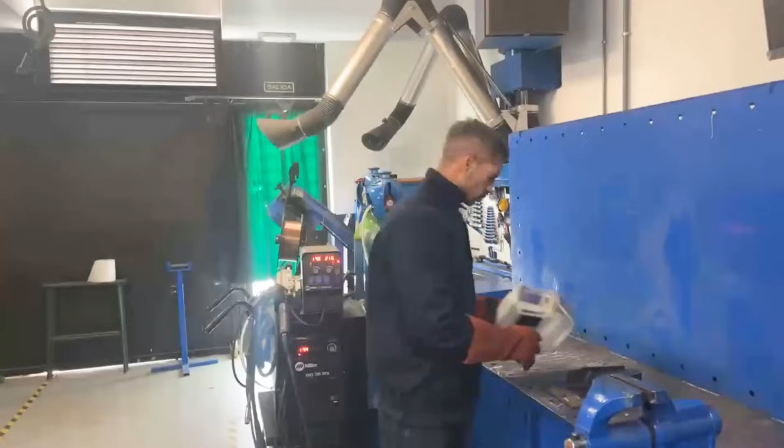Hello, I was waiting for you. I was actually training on this workpiece. This workpiece is a suspension bracket. It's quite complex - this is my 5th trial, but it's not actually the most efficient way to train nowadays.

Not only on real welding, I am actually training also on a simulator, on the Seabery welding simulator. I'm going to show you more about the augmented training methodology that we apply, because every time I train on this workpiece is costing us around 300 euros. As you can imagine, it's not the most efficient way to train, not the most sustainable either, and not the safest, because it's quite dangerous. But now I'm going to tell you more about this methodology, this technology. Come with me, let me remove my jacket, and I'm going to show you everything about the augmented training methodology that we apply with the Seabery simulation technology.

There we go. Come with me, please.

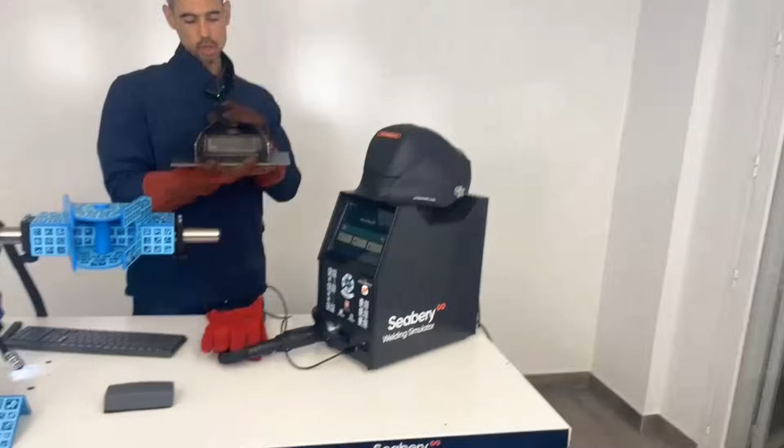Welcome to our Augmented Lab. The coupon I was showing you before is a suspension bracket. It's on carbon steel, and it's quite particular. I need to weld 4 or 5 different welds here, welding joints, and doing that in real is not the most efficient way. We actually have much more engaging, safest, green and efficient ways to do it, which is using the Seabery technology, by which we are able to customize welding training joints using augmented reality.

What I have in my hands right now is the simulation coupon. It's the coupon that we use to parameterize exactly everything that I will be doing in the real workshop - the material, different joints, the WPS, everything - so that we can visualize and exercise all of that using this simulator.

Today, we're going to be talking about the technology. We're going to be explaining what this is about. And the most important thing, we are going to be actually showing you how it works for real. So we're going to be testing the technology in front of you. My name is Antonio Fernandez. I welcome you all, thank you very much for your valuable time. And now we're going to go to the presentation that we have prepared for you.

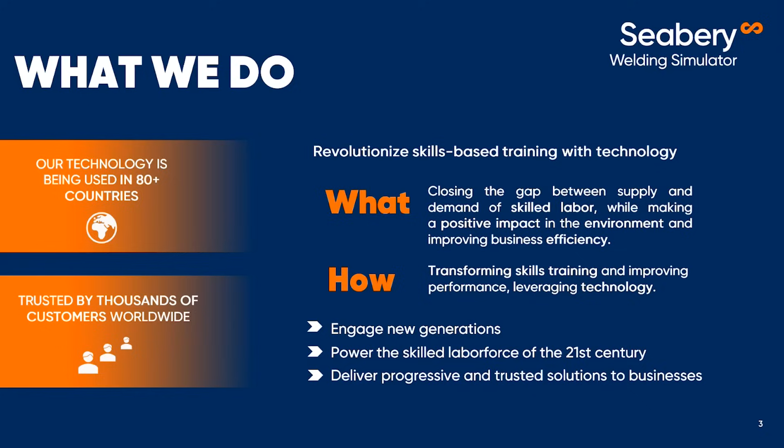You may know that there is a tremendous shortage of welders in the global industry. No matter if you look at America, Europe, Africa, or Asia, this is a common problem - it's a problem of the world. And this problem cannot be sorted out by using the traditional methodologies to train welders, because this is very inefficient, and it's proven that it's not working. Also, when you look at engaging new generations into the welding trade, it is fully demonstrated that you cannot do that with the traditional methodologies.

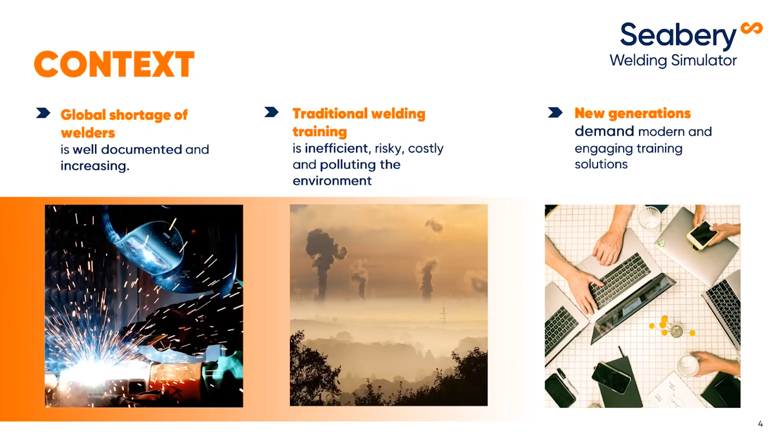But we have a solution for it. This solution is what I was telling you about earlier in the workshop. It's called augmented training. The augmented training is a methodology that combines the real workshop together with the simulation space. This is very important to understand: this methodology does not eliminate the real workshop. Totally the opposite - this methodology is going to enhance the real workshop by preparing the welder in the simulation space.

The simulation space is what you have on the left of that augmented lab. It's a space that works on simulation, which means we don't use real materials, we don't have real consumables, and therefore, as you can imagine, it's going to be very efficient in cost and in time. Also, it's going to be fully green - every time we weld here, it's going to be with no CO2 and with very little electrical consumption, which is going to be very beneficial for our environment.

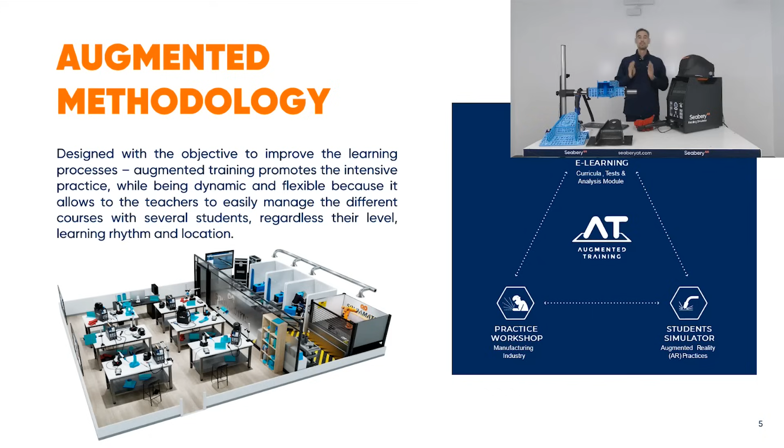Once the welder has trained the muscle memory, then it will go to the real workshop, where we are going to be mastering the skills. We still need to go to the real workshop, but we're going to do it in a very efficient way, so that when I go, I will know what I'm doing. And all of that is going to be tracked and coordinated through an e-learning platform, because this technology allows to send and retrieve information from a centralized database that is going to be fully controlled and managed by the welding instructor or the welding supervisor, which is very powerful and interesting.

We'll show you more about that too.

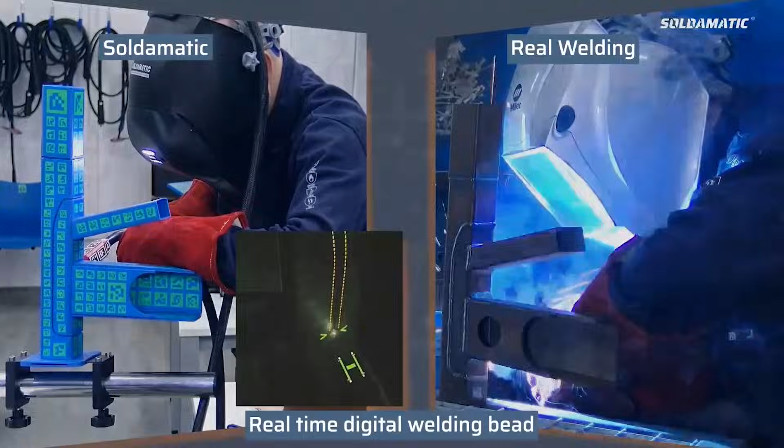This video resembles very well the realism that we are able to achieve with this technology, because this is the key. The key is to be able to replicate in a very realistic way that real environment in augmented reality. What you have on the left is the simulation space. You have the welder wearing the gloves, wearing the helmet, and welding in the same position as in the real workshop, which is on the right.

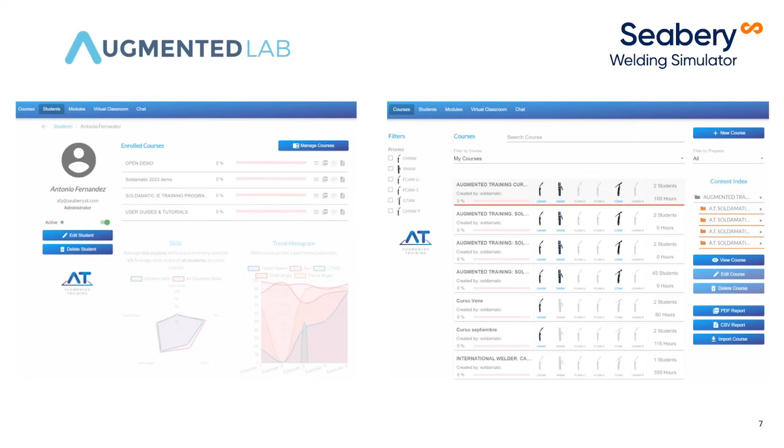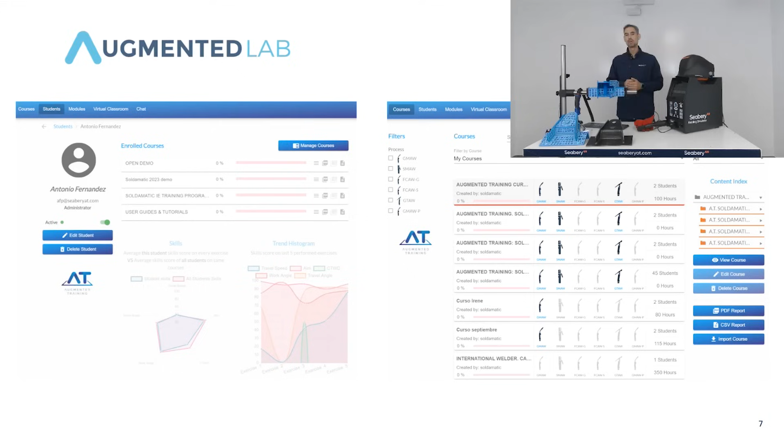All of that is happening on the simulation space, which is going to be centralized with information through an e-learning platform that is going to provide us with insights, with reports. It's going to allow us also to personalize the training path for every welder, etc. We're going to see also more about that. This is a very powerful tool that cannot be replicated in real welding.

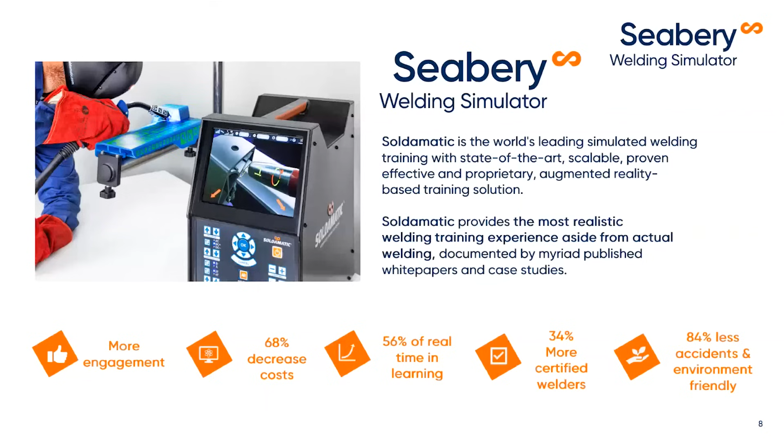So this methodology is actually proven. As I said, we have deployed this technology in more than 80 countries for more than 12 years. And with all this history, by testing it with different institutions, different companies, academics, industrials, etc., we have been able to conclude that this technology is, first of all, more engaging. Secondly, it's going to be also very efficient. Different numbers apply, but you can count on more than 60% savings on applying this technology, the combination of augmented reality with real training, but also the reduction on time.

Reduction on time, especially because when we are welding on simulation, we're going to be focusing on the most important part, which is the arc time. Arc time means the time that I'm training my muscle memory, which is what I really care about. As a conclusion, we're going to have better welders, more certified welders, more quality on the welders, because these welders are going to be able to train in the same amount of time, with more attempts, more trials, and then we're going to be able to have better welders.

That will reflect at the certification point. We will be able to prepare our welders better for certification. And all of this with a very green technology. Imagine that one single hour of real welding in that workshop will be issuing around 6 kilograms of CO2. Here we are doing 0 kilograms of CO2. So you can imagine the great impact that we have on the environment.

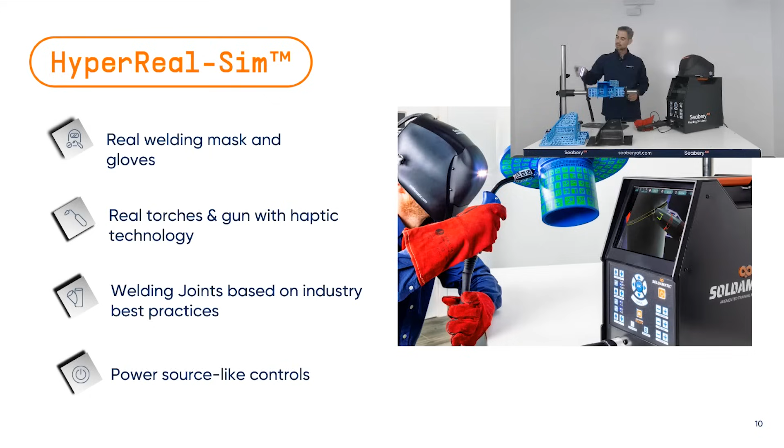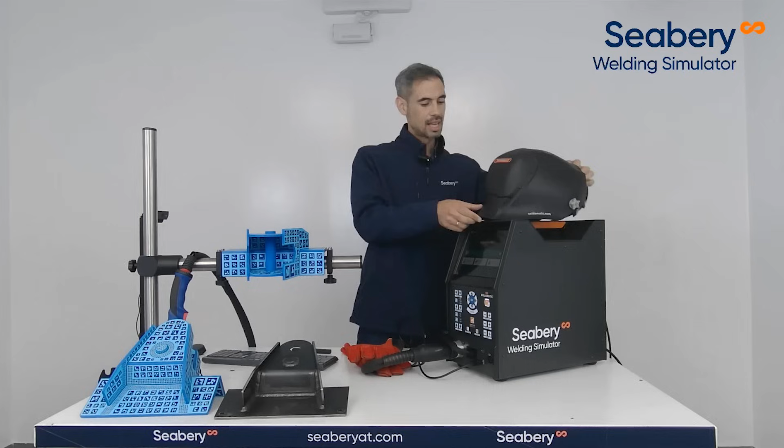The most important point here is to make sure that the technology resembles the real workshop. It needs to be very realistic, hyper-realistic. Not only in the real elements, as you can see here, we are using real torches, for instance. This is very important because we're going to be training the muscle memory, so it needs to really feel the weight and the shape. We are going to be using real gloves and a real helmet. We need to make sure that this is as close as possible to the real scenario that we're going to be living later in the real workshop.

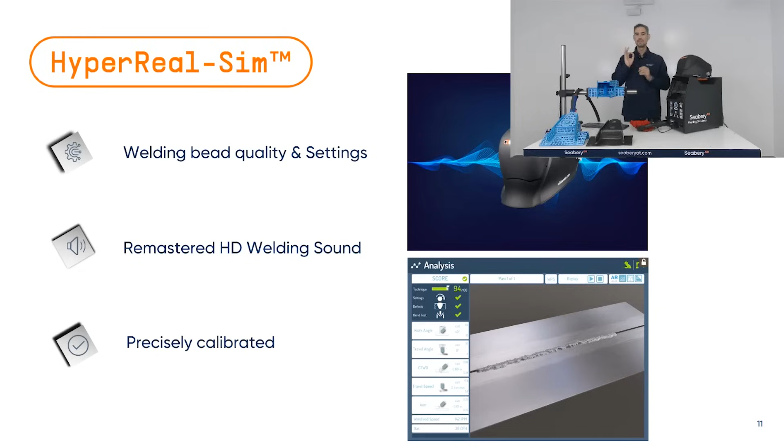And also what we see and what we hear. When we look at this technology, this cannot be thought of as a video game. Everything that happens in the welding scene, in the welding bead, all of that needs to resemble real welding in the same way. That's what we call parametrization. We have parameterized the technology in such a way that what you see and what you hear is going to be very, very near to what you will see and hear also in the real welding, which is key for a good welder.

And not only that, we go beyond reality. Not because we're going to make anything new or imaginary, but because we are able to use technology to analyze the quality of the welds and to understand in a very objective and pragmatic way the skills and technique of the welder. We are going to be able to track mechanical resistance, cross-section analysis, as you can see here on the right of the screen. Imagine doing that in the real welding workshop only - it would be impossible, very costly.

And not only that, we will be able to have real data. In the real welding, it's very difficult to have data. This technology is employed in different industries, whether it is for training providers or whether it is for actual companies that are training new welders or upskilling actual, professional welders.

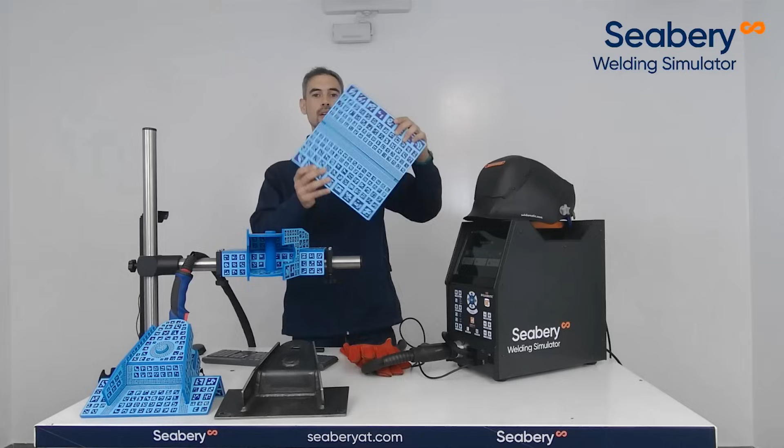The technology is fully prepared to answer not only the standard certification coupons—coupons that everyone knows, like this butt joint—but also to answer the demands of specific sectors, like what I have in my hand. This is what we call an advanced welding multi-joint, which resembles the best practices in the railway sector.

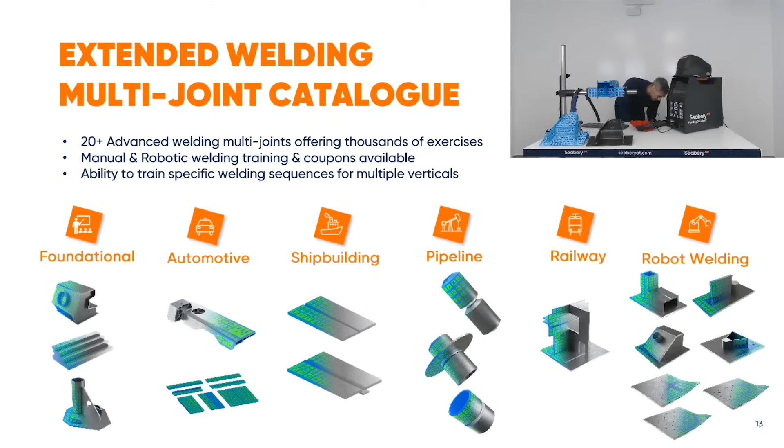On the screen, you'll find different applications for different industries, like automotive, piping, and all of that. So we have multiple industries, and we're able to customize further. Whether you are training on manual welding or robotic welding, I'm going to show you now how this technology will help you train better welders.

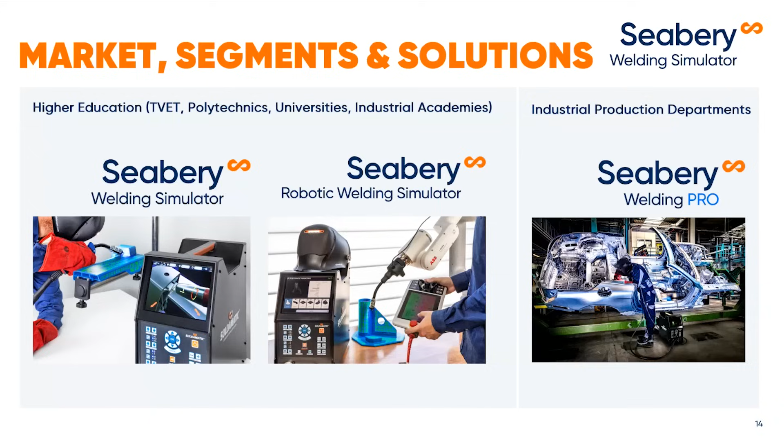This can be applied by the training sector, as I said, or also the industry sector with Seabery Welding Pro, which is also what I showed you before here. This is actually Seabery Welding Pro. It's taking the technology to the highest level so that we can resemble as realistic as possible the real workshop.

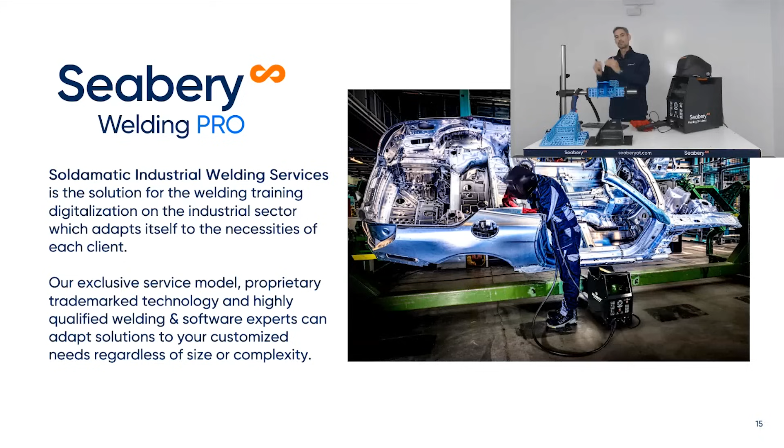Welding Pro is a service, a technology provided to industrial companies to make sure that their actual professional welders are able to upskill according to the demands of the production department, so that we can increase their performance and therefore have better results in the production line, lower quality issues, and become much more efficient.

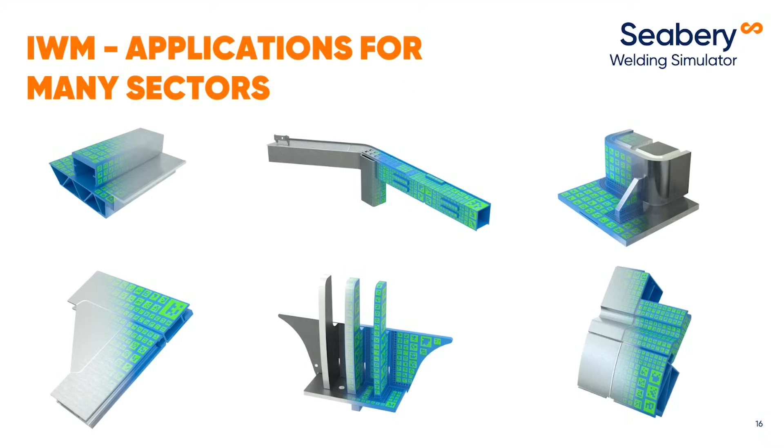Here on the screen, you can see multiple applications of customized coupons. This sort of customized coupon we can apply to any sector, whether it's construction, heavy fabrication, shipbuilding, or railway. These are some examples only, even nuclear sector.

Today you're going to understand fully if this can be helping you in your actual problems. Let's get inside a little bit more on the technology and how it's going to resemble those coupons in Welding Pro. This coupon is a butt joint.

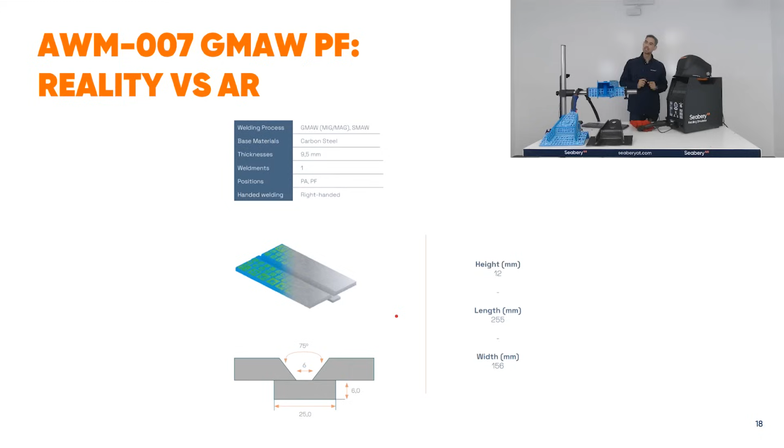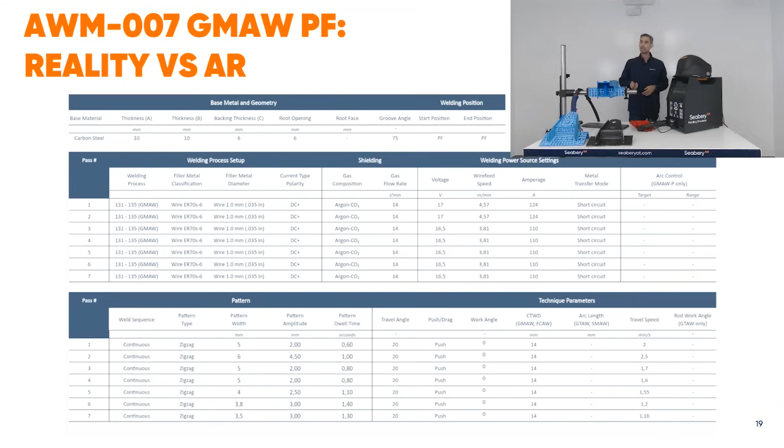It's a butt joint, but with a backing—a specific backing of 25 millimeters. We have a root of 6 millimeters, it's carbon steel, and the thickness of the plate is 9.5 millimeters. We're going to have a full WPS, parametricized in the system. This WPS is going to give us the backing details and a number of passes.

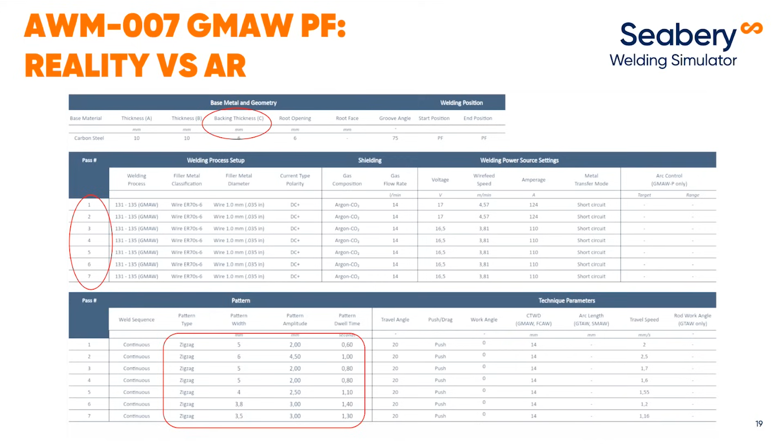In this case, seven passes. Every single pass is going to have a waving of zigzag. We're going to have a pattern of zigzag with different width, amplitude, and dwell. So we can get to that point—to this very single detail of the WPS with a very specific travel speed.

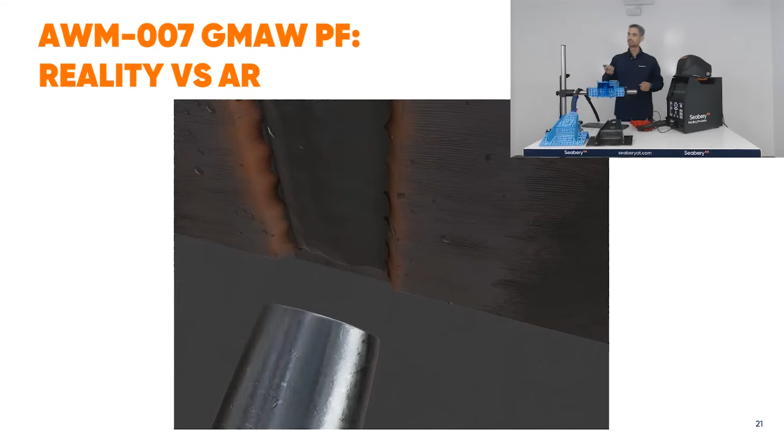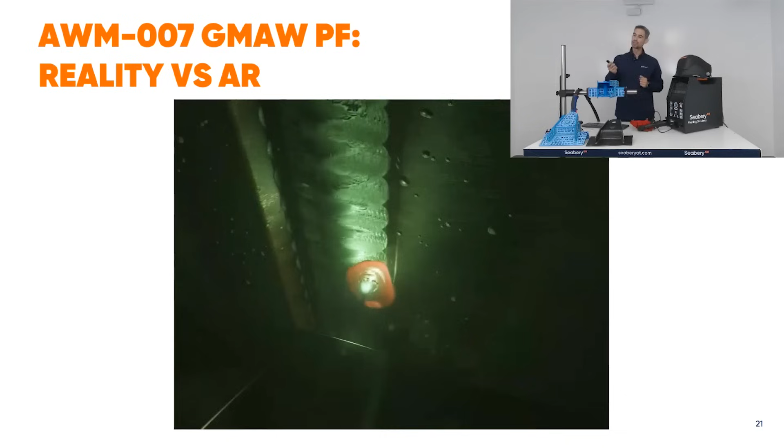Here you're going to see also a little video of the simulation, so you can see how the welding puddle is merging. You can see how realistic it is. You're going to see that in a second in real, anyway, because we're going to be welding today. But I want you to already have a feeling of what the simulation looks like, and not only the simulation, but the result.

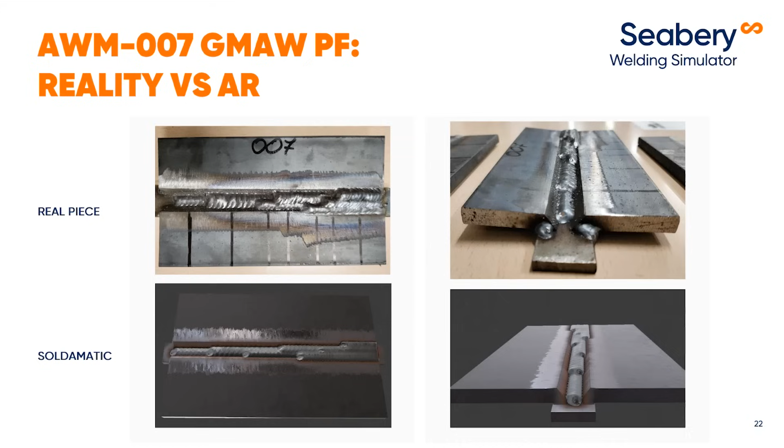The final result in this particular coupon—you will see the one that was welded on the real piece on top, and at the bottom, the simulated one. You'll be able to differentiate every single pass. As we said, we welded 7 passes, so you can see clearly every single pass via visual inspection.

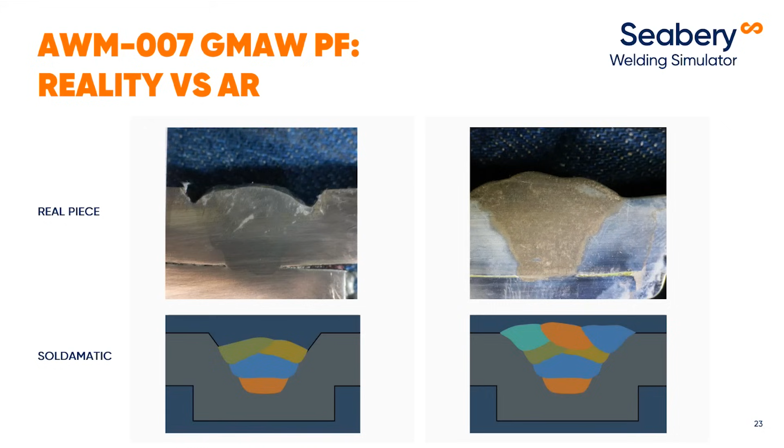But not only that, we can get inside—we can do a cross-section analysis. The one done above was done in the real coupon, as you can see, but the one below was automatically given by the technology, in the simulation, without any cost. Imagine how powerful it is.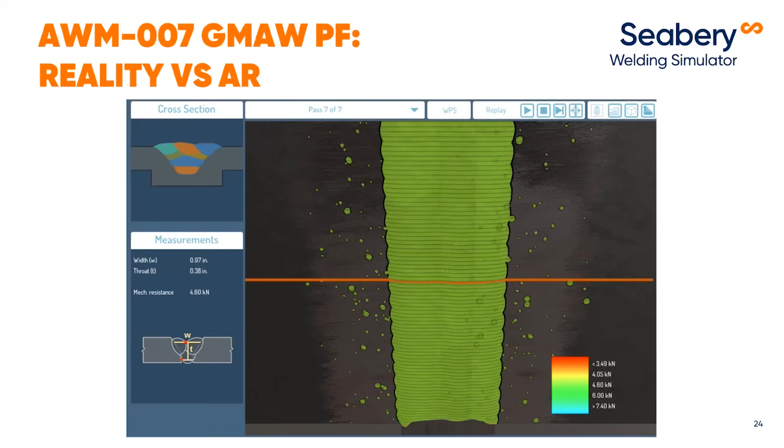We're able to see the cross-section, differentiate every single pass, and have a proper understanding of the mechanical resistance of that particular weld. Look at that—this chart shows us, in the very specific section of the weld, what is the mechanical resistance, what is the width, what is the throat. You can see the legend of the colors over there—green is the optimal color, red will be too weak, and blue will be too much.

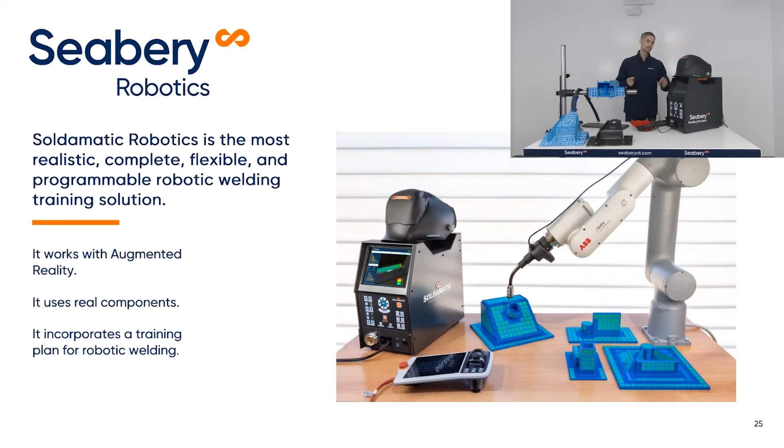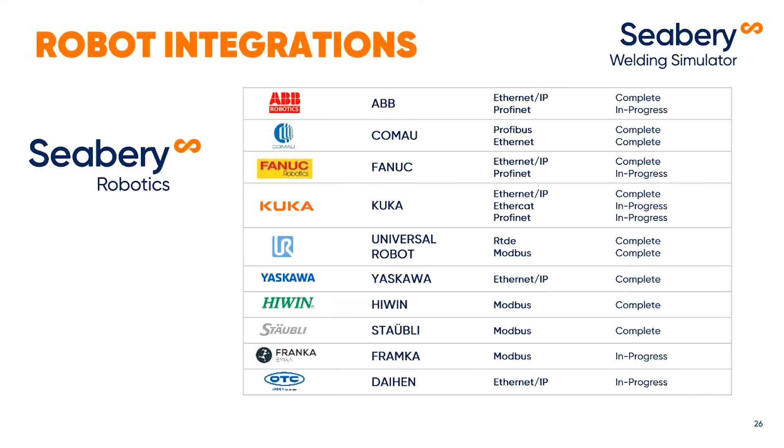As we said before, this technology can be applied also to robotic welding. In the same way that we are going to merge the real environment with simulation, we are going to have a torch on a real coupon that helps us connect to the simulator just as if it were a real power source. This is very powerful because it can connect to any robot in the market through different protocols. We have a technology fully prepared to integrate with those robots so that we have very realistic training.

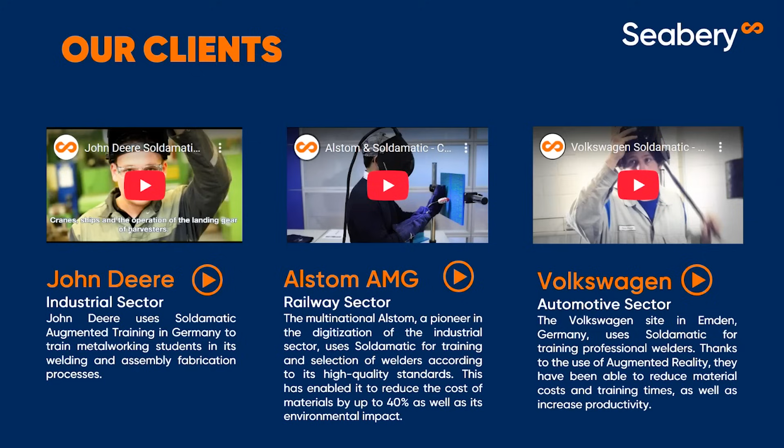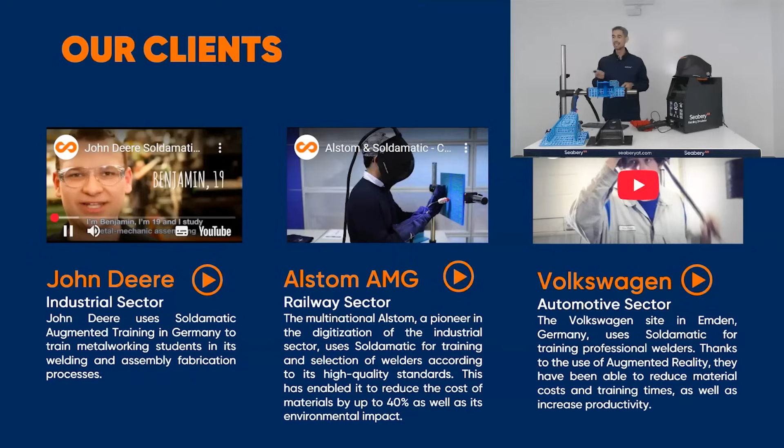This technology is applied by different sectors, whether in industry or in the training sector, by big names like John Deere, Alstom, Volkswagen. I definitely encourage you to go to our different channels, like YouTube. You'll be able to find many cases like the ones I'm showing you on screen, and I'm pretty sure you'll resemble yourself in many of these. Not only industrial, but also training providers and even well-respected institutions in the market, like DVS or Weld Australia.

And now let's get to the most interesting part of the webinar, which is the real demonstration of the technology. Now we are going to show you, first of all, how this looks with the real elements of the technology. I'm going to focus first on the hardware components. What you have in front of you is the actual simulator.

It looks like a real power source on purpose. In fact, here in these buttons, you will be able to manage the different welding parameters like the voltage, the amperage, the wire feed speed, even the gas.

And we're going to have connected to the simulator this helmet, which, as I said before, is a real helmet. This real helmet has two cameras, and we are going to be able to see through those cameras inside the helmet. We'll be able to see the real world, not only the virtual world, but also the real world. That is augmented reality.

Then we're going to have also real torches. This, for instance, is the MIGMAG torch, as you can see. So we can do GMAW and FCAW processes. This is a real torch, and we only change the tip of the torch so that we have a high definition camera inside for the best tracking ever.

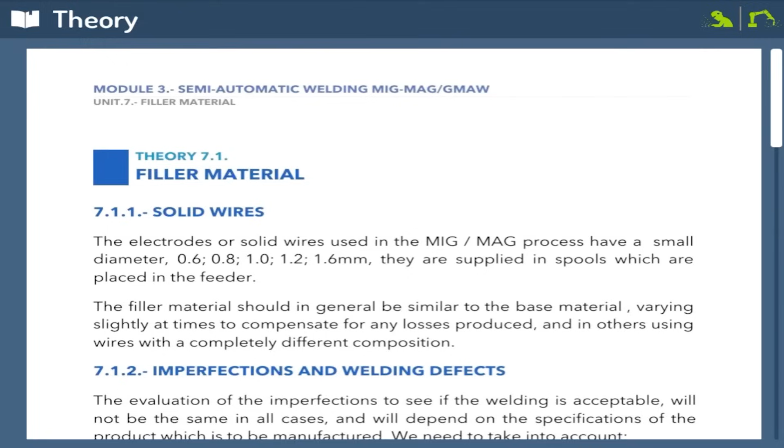These courses can be not only for practices, for WPSs, but also for theoretical contents. Let me show you a very quick example. For instance, this is an introductory module that my welding instructor has given me to learn more about filler materials - what type of wires, electrodes, etc. - that I will be using in my training.

This is also an evaluation quiz, so I can not only learn about theory, I can also evaluate my welder's own knowledge. And all of this can be done in the simulator, but also in the computer, in the laptop, in the tablet of the welder.

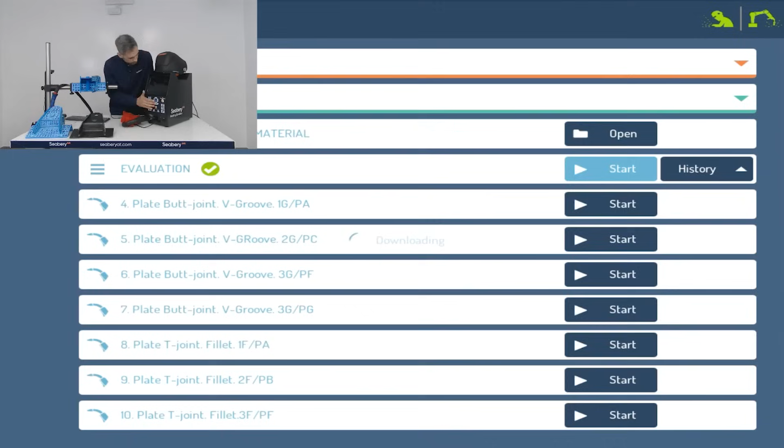So that they can consume all this information in a very accessible way. Now, as you can see, these different lines are going to tell me different exercises that the instructor has designed for me. I'm going to go to the very bottom one, which is the one we have prepared for this webinar, for this suspension bracket. There you go, which is going to resemble this one, the one I was doing in the real workshop back there.

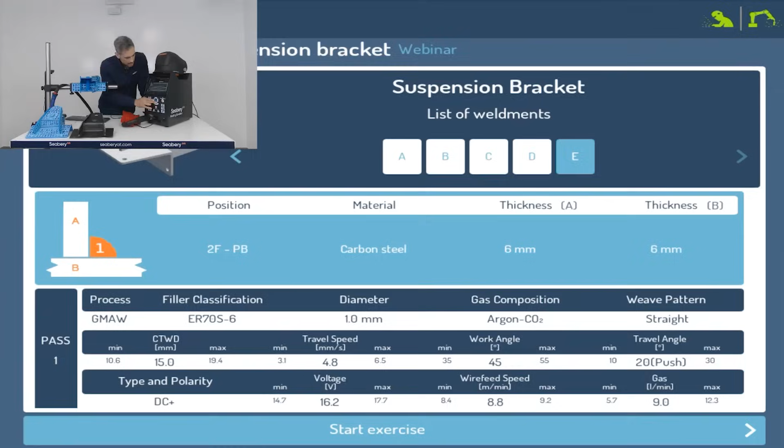This coupon is going to have 1, 2, 3, 4, and 5 weldments. Every weldment, as you can see, with a very specific WPS on carbon steel. I will need to be welding according to a very specific voltage, travel speed, amperage, etc. And we're going to see how the combination of all those parameters are going to play a role in the simulation.

Now next, you will see how the helmet is going to light up. And what you're going to see is actually what I see inside of the helmet. So the first thing I will do is activate the augmented reality. Let me show you how we can see.

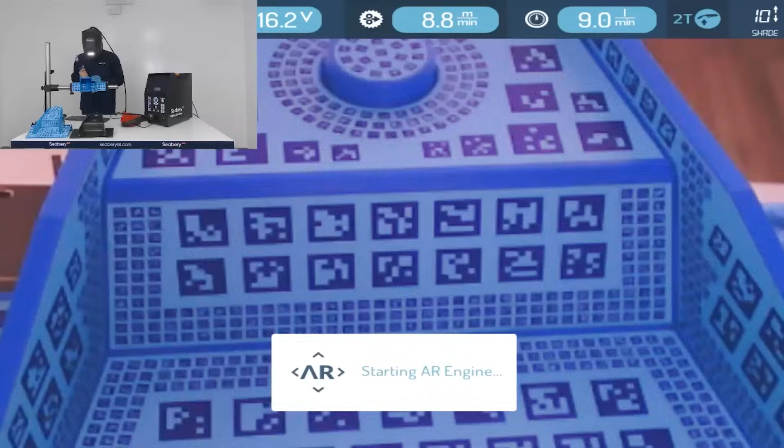I can see my hands. I can see my colleagues from marketing over here helping me with the webinar. And I can see the coupon. But this coupon right now is the same coupon that I see in the real world. What I will do now is augment the coupon. There we go. Now I can see my carbon steel suspension bracket, and I need to start welding over here.

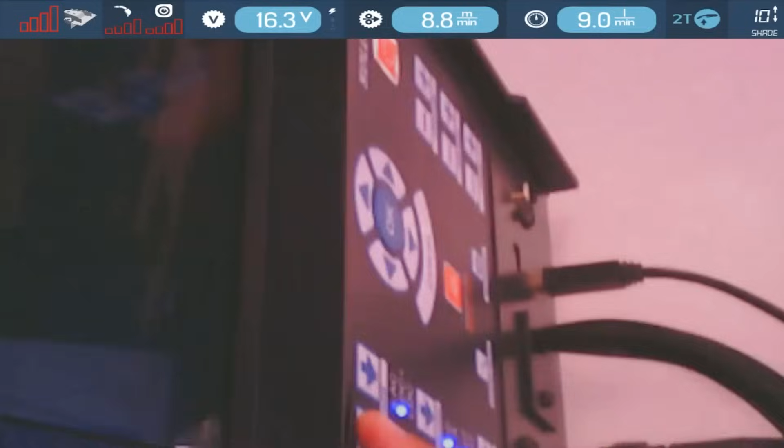I can also see, if you look to the top, the parameters, indications, voltage, wire feed speed, gas, and all of that can be managed through the machine.

So let's have a look. I'm going to wear my gloves, as we said. Very, very important, please: never weld without gloves. And I'm going to start over here in this specific weldment.

You can see the icons, they become red and green. As you can imagine, green means I'm doing a good job, and red means I need to correct something. We can measure different parameters, like this CTWD, the distance from the torch to the coupon, and the different angles. When I weld, I need to try to keep everything as green as possible.

So let's go for it. There you go, I hope you can hear the sound. There you go, the system is telling me to correct my angle a little bit. There you go, much better. Those arrows in green were telling me also to go at a certain speed, because speed is quite important when welding.

I'm going to be switching now to my left hand. I'm right-handed, so let's see how I can do this. This is a good way to practice. See, the system is telling me my angles need to be corrected. There you go. Okay, now I need to weld this side.

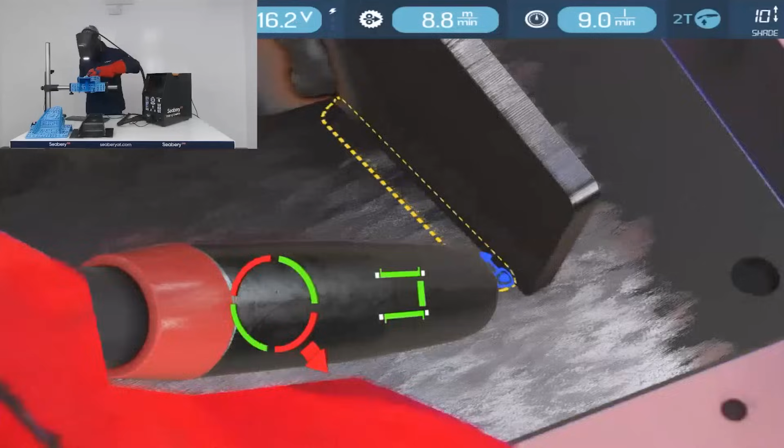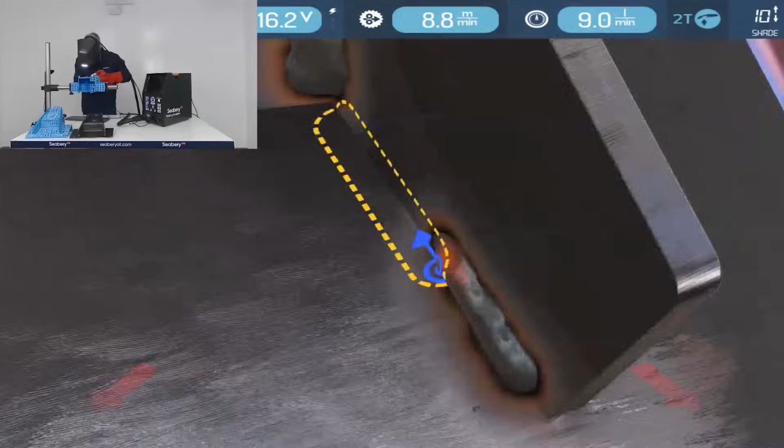Not bad, not looking bad. And we can remove also, lower the voltage, for instance, or increase it, all according to different transfer modes. For instance, if I did this—

There you go, you can see now that I'm welding on spray, a spray transfer mode. The number of spatter is much lower, but I can see the welding bead is also wider, and the amount of wire in the welding bead is much higher.

Let's continue with it. Now my WPS has reset to the initial values, which are the correct ones, by the way. I should not be doing this on spray.

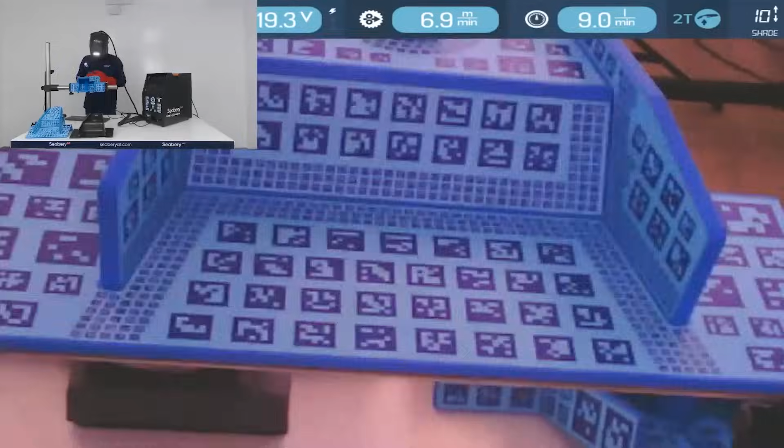But let's see what happens if I do something actually silly. If I remove my gas, you can see that there is a 0 in red, so the system is definitely telling me I should not do this. But I'm going to do it anyway, just to test the technology.

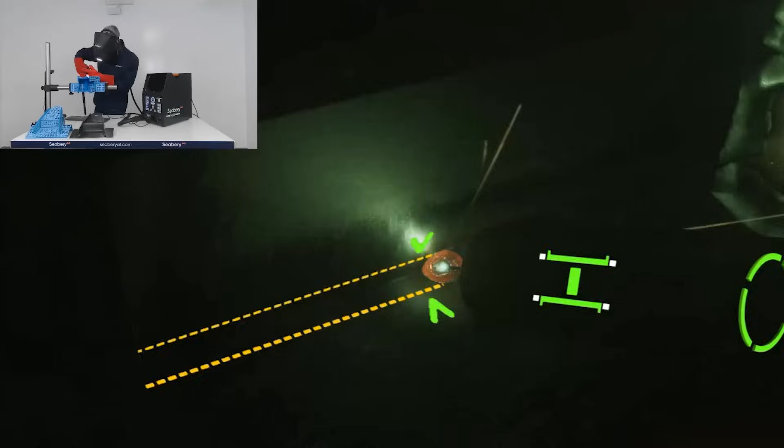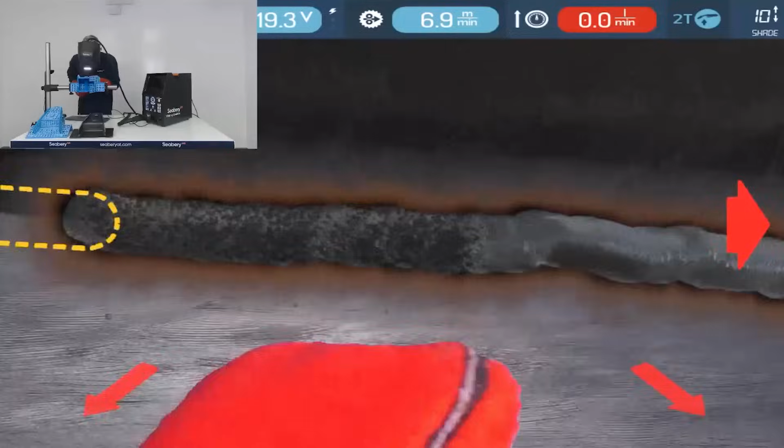Well, there you go. Definitely this is not looking good. This is looking like a lot of porosity because there is no gas protecting my welding bit anymore. Like here, I had it, here I don't. So I should not do this. I should actually get my gas back. There you go. And continue welding.

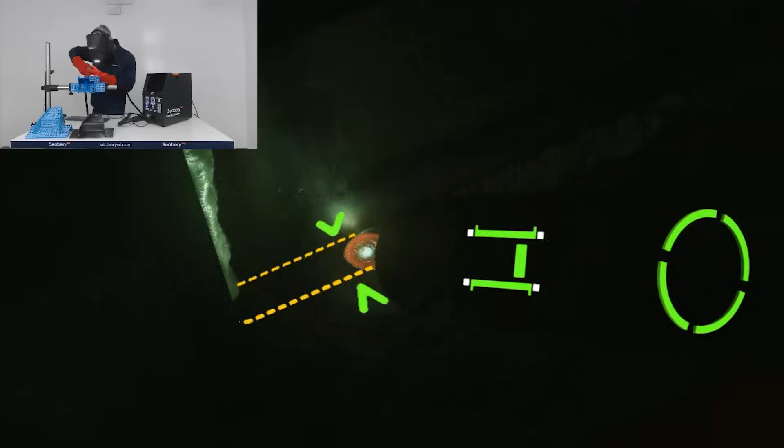The realism of the welding pool is very, very high. If you are a welder, you know what I'm talking about, because the sound, the way that the welding pool is melting, this is very important for you. You need to know what is going on in the weld. And here I have a little point that I need to weld as well. Let me do that. There you go. I cannot miss that. And finally, it will be the last joint. Let me look, I'm going to try this weld. Let's see how my skills are.

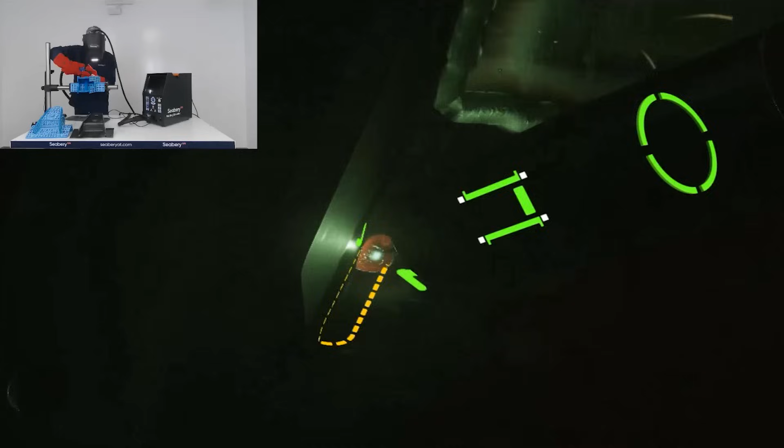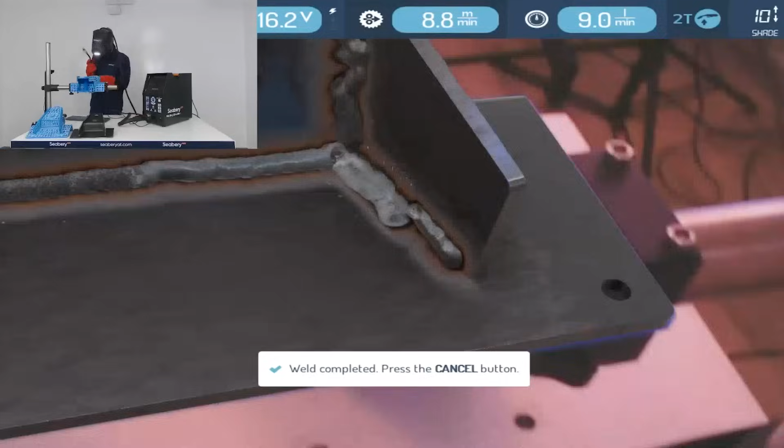There we go. Well, this one is looking much better, especially than this one, as you can imagine, right? And also than this one, because we were working with the high voltage with the transfer mode of spray. So this is the weld after I did it.

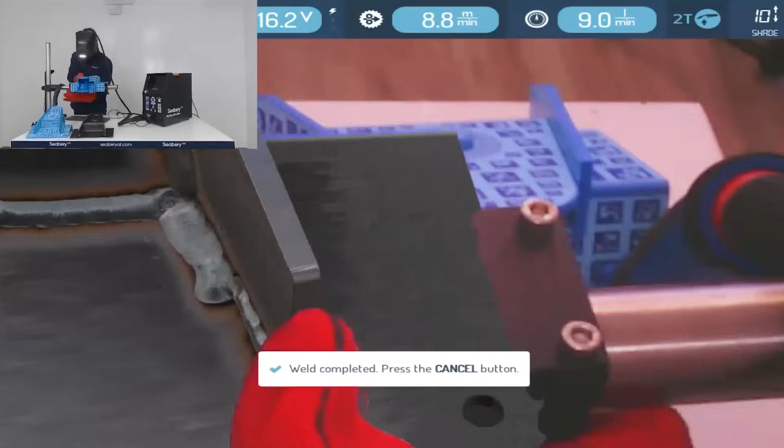As I said, this is not costing me anything because I'm working on simulation technology. And I can definitely continue practicing to make sure that I do it better. But what does better mean? Because at the end of the day, I'm still training, I'm still learning. I need to know what I need to do better, right?

There you go. Now we're going to go to the analysis module. In this analysis module, you're going to see how I performed. And what you're going to see is actually something that you saw when I was welding through the e-learning platform. The e-learning platform is the one that the welding supervisor, the welding instructor is going to watch, is going to be able to watch when you are welding, right?

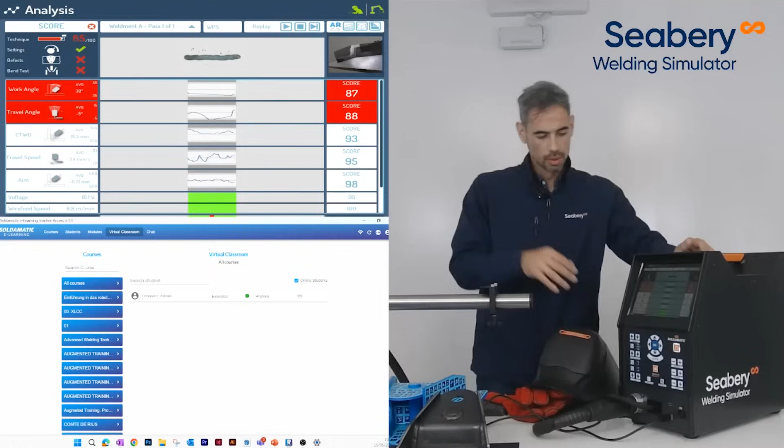That e-learning platform is going to show us real time everything that is going on in the weld. It's going to show you the parameters of your skills in real time. It's going to show you the score of your work angle, your travel angle, the CTWD, everything, okay? The speed, everything, the aim. You can see here I can analyze all of that data for every single pass that I have done.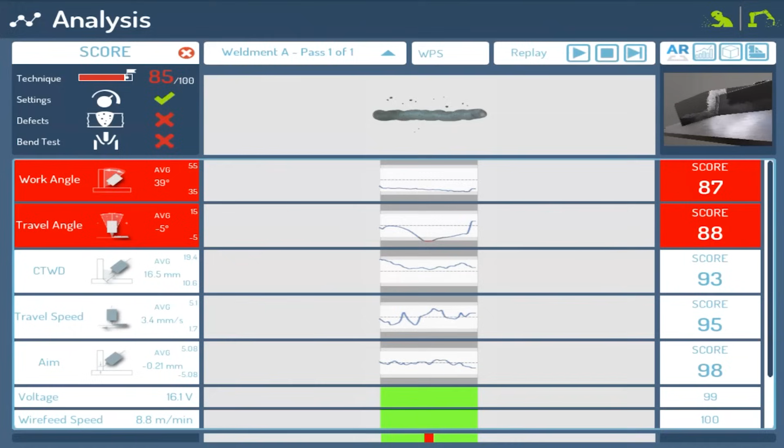Every single weldment, right? So if I stop here for a second in this pass, in this weldment, I can see that my settings were okay, so there is a check, and my scoring was 85. That 85 is coming as the average of the scoring of every single variable parameter here: work angle, travel angle, CTWD. You have it to the right, 87, 88, 93. The average of all that is my 85, which means that I did not pass. My skills technique on that particular weldment were not as good as needed, okay?

I can also see that there are some defects. The system is telling me that as a consequence of my skills or my parameters, I had some issues, which in this case, as we can see, is related to spatter, okay? It's not much, it's not too much, but it's definitely important because finally, I will not be able to pass a bend test. You have the icon of the bend test. This is a simulation of what would happen with this particular weldment if you go through a bend test without doing the bend test. Imagine how powerful this is, right?

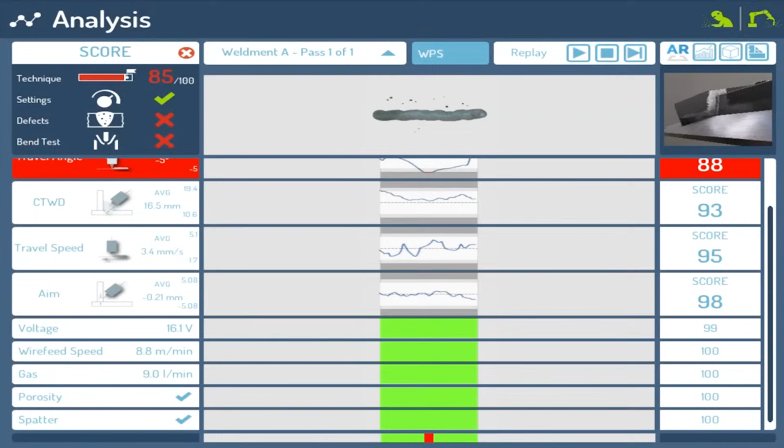We can replay the whole exercise. We can come here, navigate through the weld, there you go, zoom in, zoom out, there you go, and see also the chart real time. And I can do that in every single weldment. So if I go to the number A or to the number B, there you go.

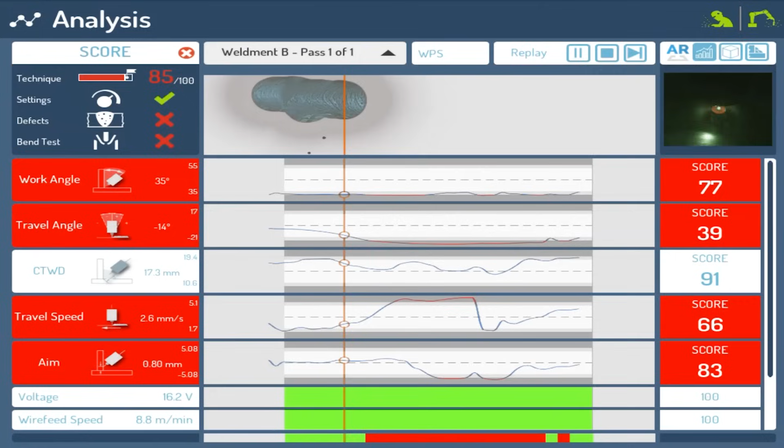Having this information in the real workshop is impossible. You cannot watch what happened in the real workshop unless you record it. But you cannot see much at the end of the day because the quality of the helmet, the vision in the helmet, is not going to allow you to see much, even with the highest definition helmets and cameras in the market. But here we can have very objective feedback.

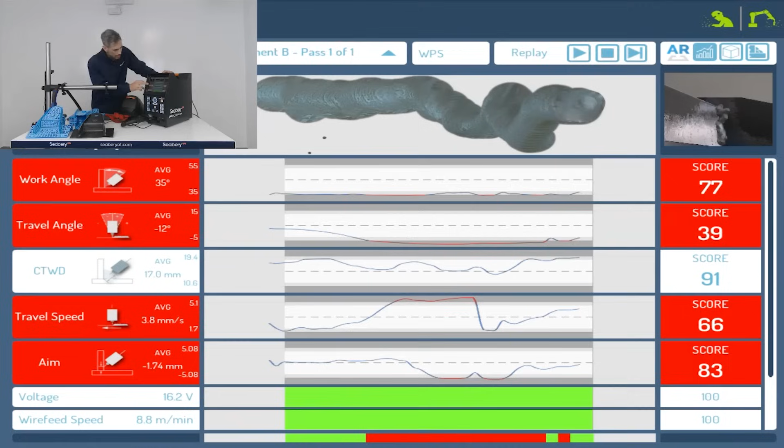We know, for instance, that in this weldment, I got the travel angle and the work angle, I failed. I need to improve that. But if I go to other weldments, there you go, here you can see the different scores for every single weldment.

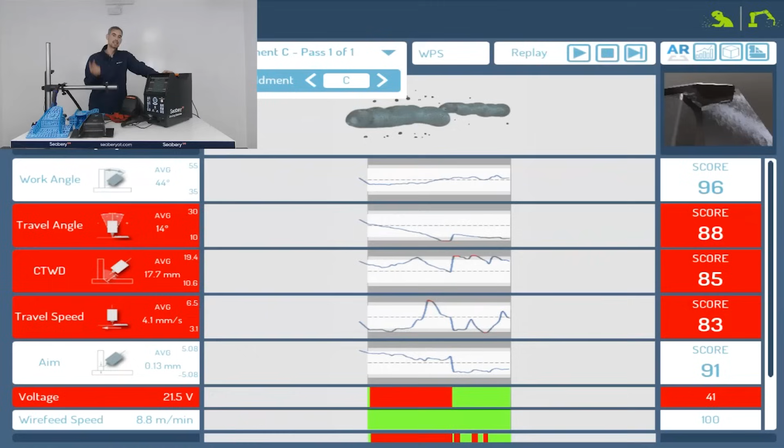Okay, I can see exactly what I need to improve in my next exercise, and then my next exercise, without spending anything on consumables and materials. So this is definitely a very strong way to learn, to practice before I go to the real workshop.

And look at this, we can even look at the mechanical resistance. When I look at the cross-section analysis, I'm realizing a cross-section analysis in every single millimeter of the welding bead. You can see on the top left corner the width, the throat, the weld size, and the mechanical resistance. Very powerful.

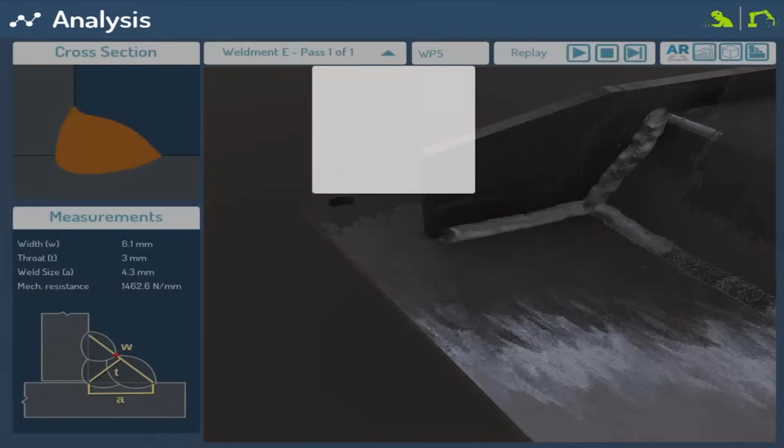And all of that I will be able to do here in the simulator anytime, because now I can stop, go back to this exercise anytime, repeat it, watch my results, or do it also in the e-learning platform. Let's have a look at this e-learning platform.

So in the e-learning platform, first of all, I'm going to have a number of courses that can be fully customized for the welders, for the students, whatever you have, according to different processes and according to different types of training.

You're also going to have a database of students, which is actually your welders, and they're going to have a performance. That performance will depend on what you assign to them and what they are doing in the simulation space. For instance, myself, I am here, Antonio Fernandez.

I just started practicing, so I can see first of all my reports at a glance. As a welding instructor, I can see how Antonio compares to the rest of the group - on travel speed, travel angle, aim, work angle, CTWD - and also how he has performed across the last 5 exercises, which can be more. This can be customized, these reports.

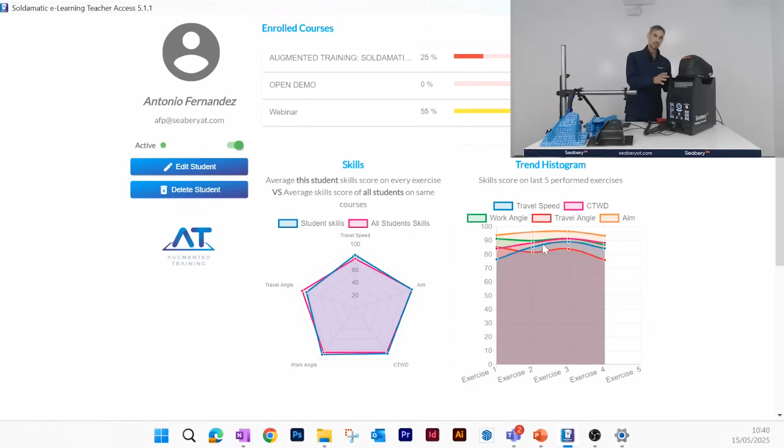So I can get at a glance how this welder is performing through the training program and how I, as a welding instructor, can help him or her. Because remember, this is a human-centric technology. It does not replace real welding, neither the real welding instructor. This is a tool for them to empower and enhance the welding training.

Here I will be able to see also that Antonio has gone through different courses - the theory module, the evaluation module, and also this webinar course that I prepared for him. So I can see that he actually read the exercise, did the evaluation, and passed it. I can get inside and see what he answered in case there was any mistake.

And I can see, very interesting, every single exercise that he has done in the simulator. So when I come here, I can open any exercise.

There you go, Maria, can you send it to me please, to the screen? You have multiple screens, so it's opening in the other one.

So I can see that I did one today, but I have done a few ones today - 4 specifically at different times. One of them I passed, but the others I didn't, I failed.

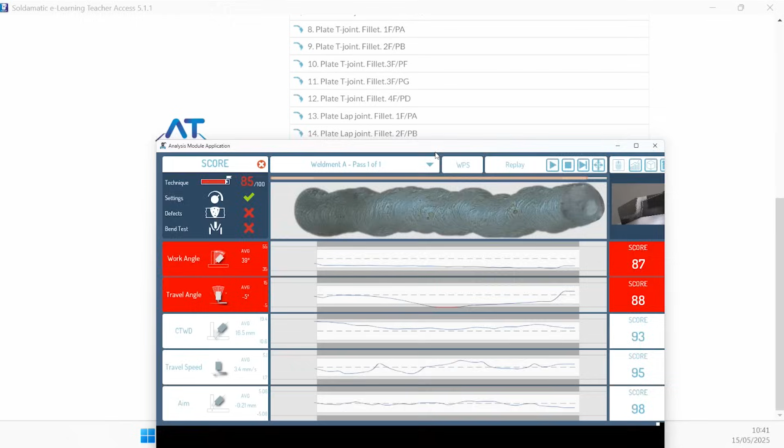There you go. Thank you, Maria.

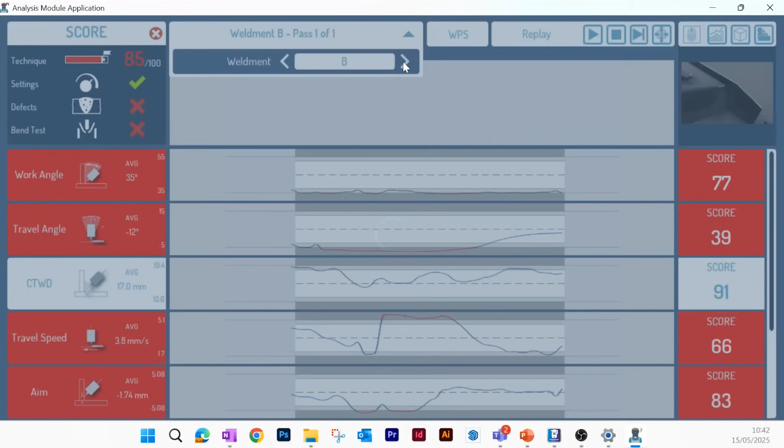So we can see here everything that I saw on the simulator. Now I can see it on my computer, on my laptop, on my tablet, anytime, anyway, anywhere. So I can get inside every single weldment, A, B, C, D, all of those that I did. I can see the technique, the defects, the bend test, everything that we saw before, the WPS, all of that is accessible.

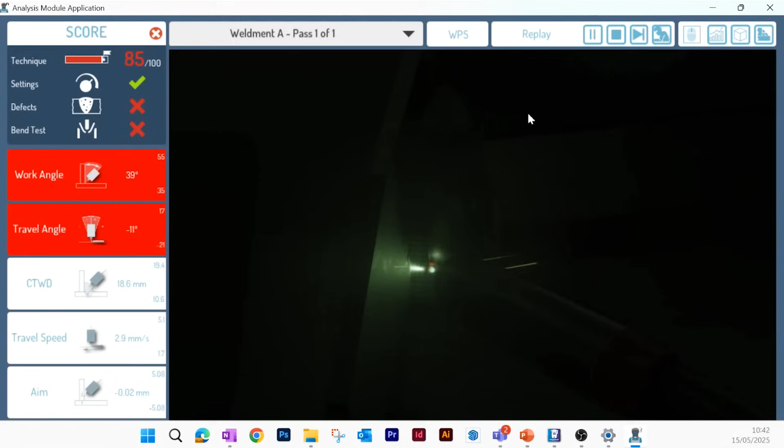So this becomes a very powerful tool. Even the videos, just like if I was in the welding simulator itself.

So I will be able to see all the details of the simulator, of the analysis module, in this platform anytime, anywhere. Not only the instructor, but also the welder. They will be able to watch the theory, the modules, the quizzes, what they have done, their reports, etc., even communicate with each other.

So it becomes definitely a very complete way to train, a turnkey welding training solution, as we call it. And this is actually the way to train welders nowadays. The traditional welding training methodology is getting obsolete, it's too costly, too inefficient, too pollutant, and definitely not engaging the new generation. So we invite you to know more about this. We will be very happy to accompany you in this journey, and we thank you very much for your time today.